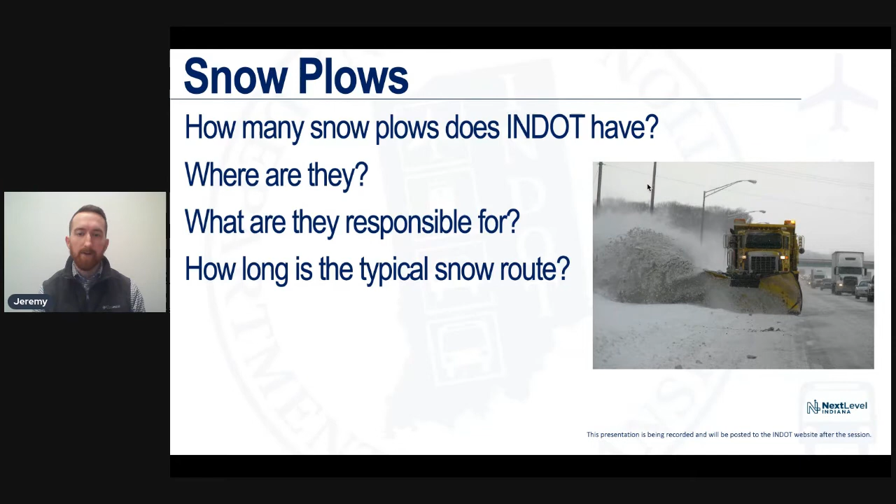So how long is a typical snow route? Snow routes can vary, but generally they're around 30 miles for the entire route. The time to completion can be anywhere from an hour and a half to 2.5 hours, depending on a variety of factors. One of the big ones is how rural that route is - does the driver have to drive a bit further to reach that route before they can even begin?

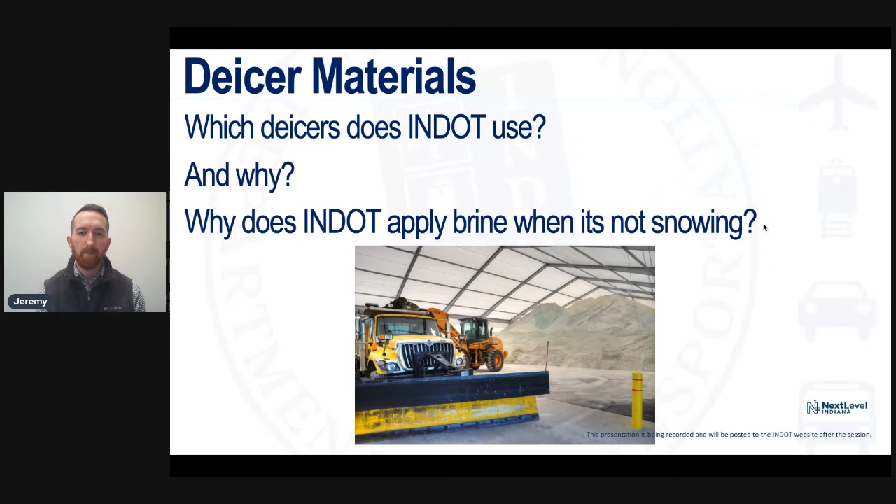That's a good question. One of the primary tools INDOT uses is called MDSS, or Maintenance Decision Support System. INDOT's been using this since the early 2000s. We were actually one of the pioneers of this system, and now it's being used by about a dozen states around the US. What MDSS does is provide a more route-specific or road-level forecast, whereas from AccuWeather or the news station you may see just an atmospheric forecast. So they take that weather impact we're receiving from the National Weather Service and AccuWeather and all of those, and apply it to the road surface to tell us exactly what we can expect to see on the roads.

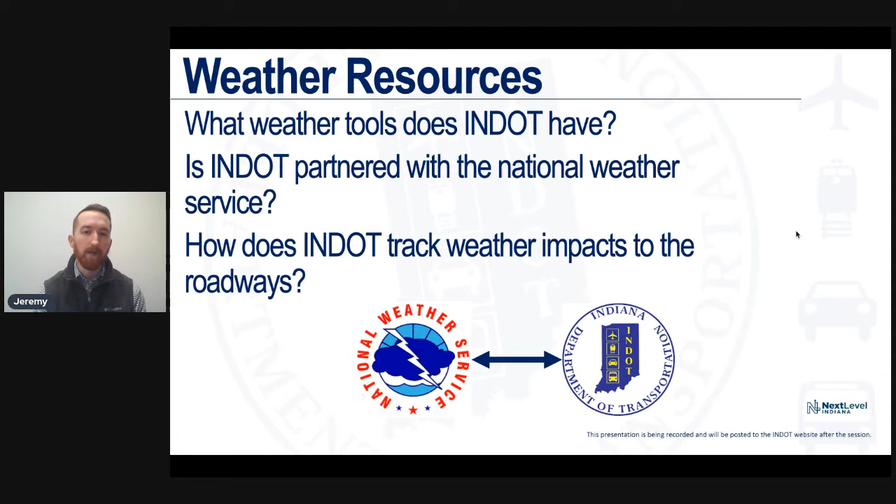Beth asked, please explain the preferred procedures for town plowing across state roads. We usually keep blades down when crossing the intersections. I don't think there's a preferred procedure - I think we should all be wary of what the other is doing at all times, whether it's the plowing or the applying of materials. From personal experience, whenever I was down south managing operations in southern Indiana, we crossed state lines quite a bit and worked with the Kentucky Transportation Cabinet, and we communicated these things with each other in advance. So I think that's the most important piece - partnering with whoever your local INDOT contact is, and having those discussions ahead of time.

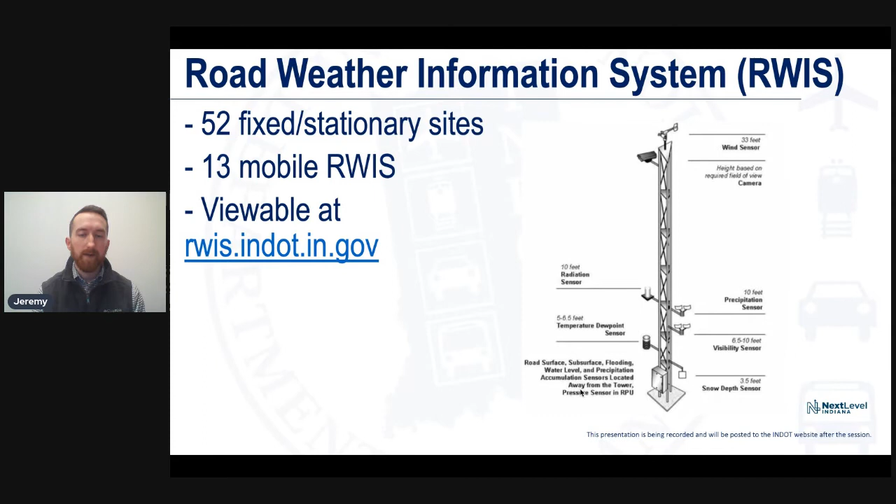In addition to that, we also have 13 mobile RWIS devices. These are installed on our dump truck fleet and a couple of supervisor vehicles, constantly out on the roadway picking up measurements in real time on the road surface. All of this information is actually viewable by the public at rwis.indot.in.gov. You can also just Google INDOT RWIS if you're having trouble finding it.

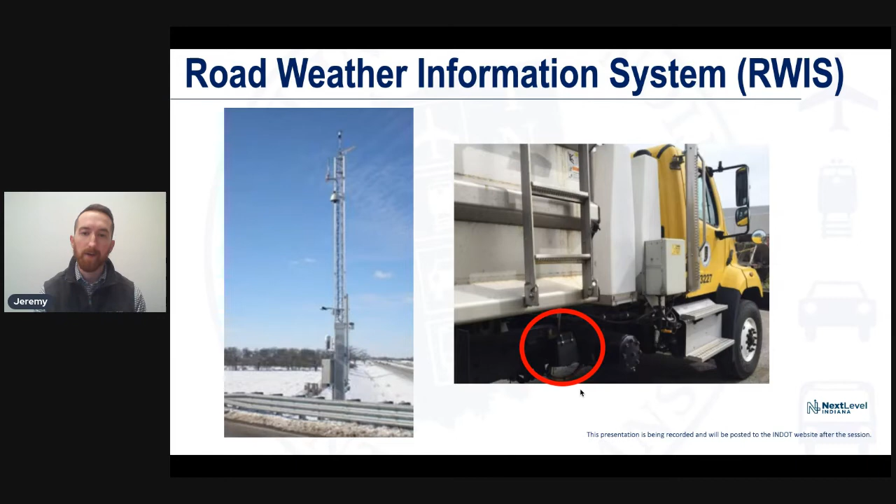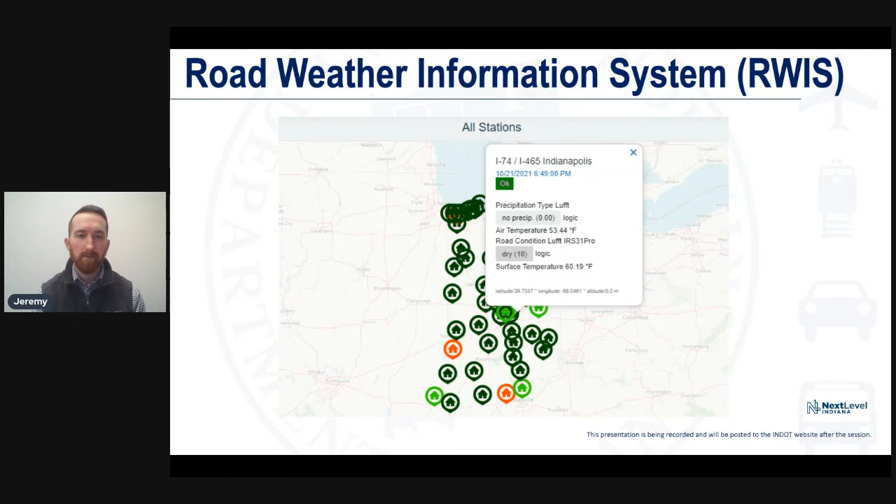If you go to the RWIS website I mentioned, this is the home screen you'll see. This is a map of all the stations we have, and if the mobile devices are deployed at that time, you'll see those on the map as well. You can click on any of those sites and it'll pull up a quick snapshot of the data that device is pulling at that time. As you can see, I have Indianapolis at I-74 and I-465, and that device is pulling data right here.

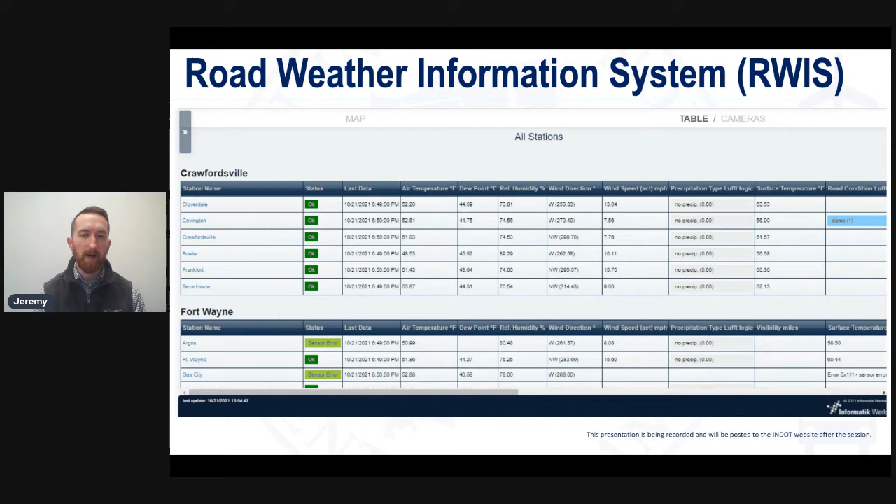Further, you can drill down by selecting any of those individual sites and pull up a dashboard that allows you to view individual weather parameters. There are also cameras installed on these sites that can provide a good deal of verification as to what's going on out there. If the precip sensor is picking up that it's raining and it's a heavy intensity, you should be able to see that on the camera. I think these are a very useful tool if you're weather savvy or interested in understanding what's going on out on the roadway in real time.

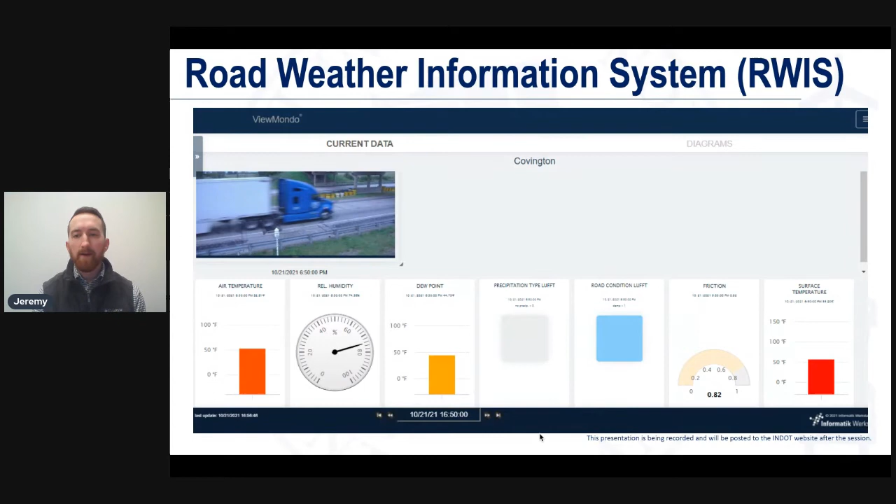The next item I wanted to touch on was our TrafficWise or 511 program. We recently went through an update on this, so I'm kind of excited that you guys get to be the first to see it.

So with that said, the two biggest changes, if you've been on our 511 before - it actually used to be called the CARS program, but now we've changed the name to TrafficWise. The biggest change is the graphical user interface. It's much more modernized, it's easier to use, it flows better.

The second biggest change is the plow tracker feature. It's very cool because, you know, we're not the first state to implement this feature, but there's a lot of good stuff that can be gained from allowing everybody else to see this plow information. So all of this is viewable at the 511in.org link I have on the screen.

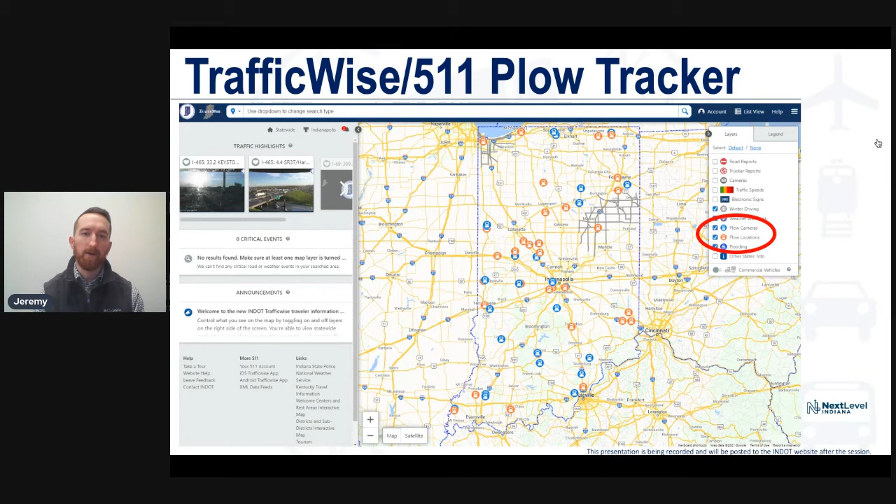So if we get into a large winter event, you're actually going to see a huge amount of those trucks deployed across the state. You can get a good idea of what's happening out there. Next slide. So I also selected one of those trucks just so I could give you a snapshot.

Unfortunately, or fortunately, depending on who you talk to, it's not snowing yet, so you just get to see rain here from the day that I pulled the information. These will be available year round, or at least that's the intent right now. So if you do want to use it, you can begin using it today to understand what's going on out there in the roadways.

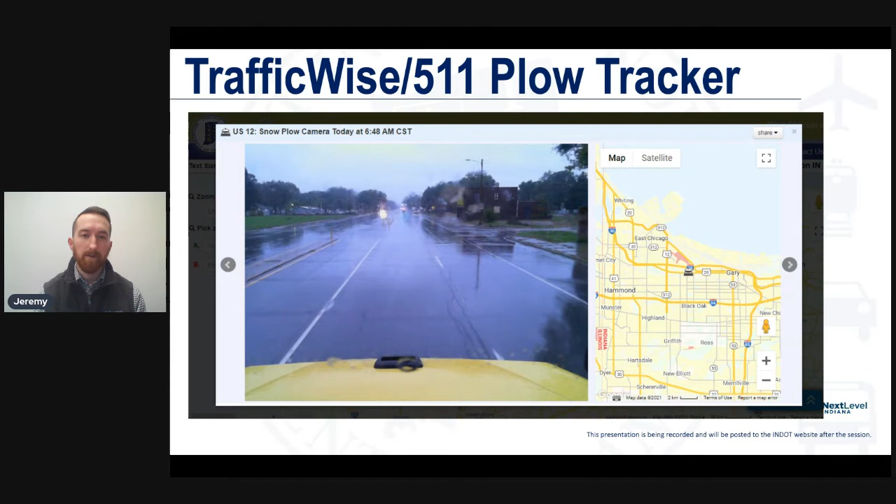I do want to make this available to everyone. It's important to us that everybody can start using this and see this plow tracker data, because it helps you make more informed decisions before you leave your house for your commute, or take your kids to school. You can get on there and actually see what's happening on the roadway, especially in your own area. Like I said, we have 1,100 snow trucks, so chances are you're going to find a truck that's near your house at the time you're looking, and be able to make those smart decisions. I really want to get people using this so we can make those more informed decisions.

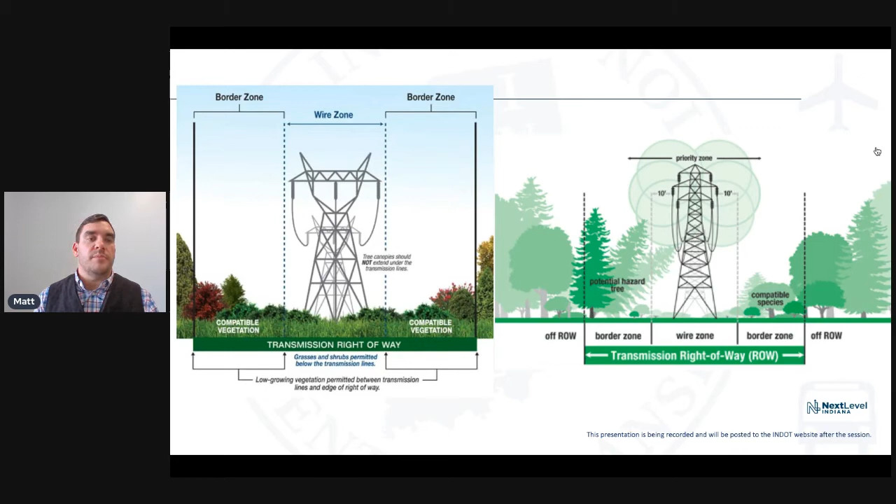Obviously, we can't have trees growing too close to those conductors in the event that there's a storm or some kind of event that causes that tree to come in contact with the conductor. The closer you are to the wires, the less you are able to keep taller vegetation in that space. So the idea of compatible vegetation or compatible species changes depending on where you are within that right-of-way space.

For instance, to ensure surface drainage immediately adjacent to the road, or if you get a little bit further off, you may need to keep obstructions like a tree or other obstructions clear in that particular space. So it may be the operational zone, for instance.

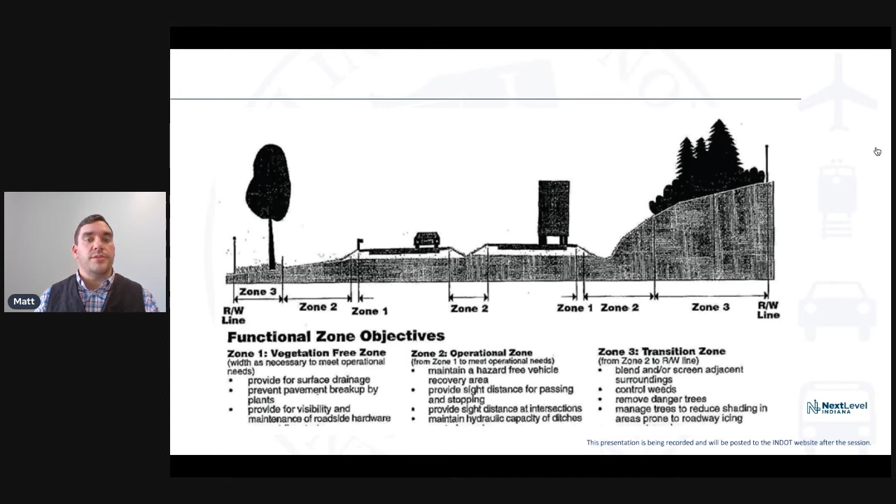So we have a handful of tools available to us to manage vegetation within the right-of-way. This is the idea of integrated pest management, or IPM, if you're familiar with other forms of management for pests. But when we get into the specifics associated with vegetation, we coined the term integrated vegetation management, or IVM. In that, we have a number of different tools.

We have the idea of chemical, or the use of some form of an herbicide. We have the mechanical tool, whether that's using a chainsaw or a forestry mulcher or a mower to be able to mow the vegetation and shorten it down. We also have—and I'll skip over the next one—the idea of biological control agents, and there are some insect pests that can be released, not something that INDOT does specifically, but has been done in the Midwest for the control of purple loosestrife, for example, or some other thistles in the western states.

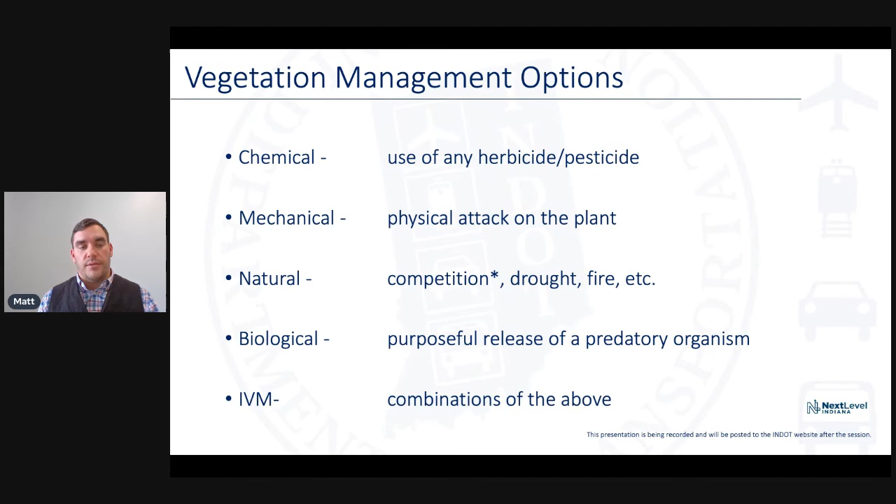This is certainly something that can be done, though our resources here are relatively limited. I have an asterisk next to the idea of competition in the natural form of vegetation management options. The reason for that is through the use of our other control options, the chemical and mechanical, we can actually promote desirable vegetation, which is used as a tool to compete against undesirable or incompatible vegetation within the right of way. I'll try to touch on that more as we move forward.

You can learn more information about this at greenercrossroads.com. There's some other details associated with that, but for the purposes of today's presentation, I wanted to discuss some key points.

One is that we are going to mow 15 feet along the edge of every shoulder, with the exception of a couple of locations. One of those is intersections, where we'll mow a sight distance triangle that's going to expand beyond 15 feet. So at a county road, for instance, that space is going to be mowed out to ensure motorists at that intersection are able to see both directions down the right of way. And in medians that are less than 60 feet in width, so on the interstate or maybe a US route with a divided vegetated median, that space is going to be mowed full width as well.

Another point where we're using mechanical clearing is with invasive brush species that are growing, most of the time, within that selective zone or beyond that space, where we'll use a forestry mulcher or some other form of mechanical removal of that woody vegetation.

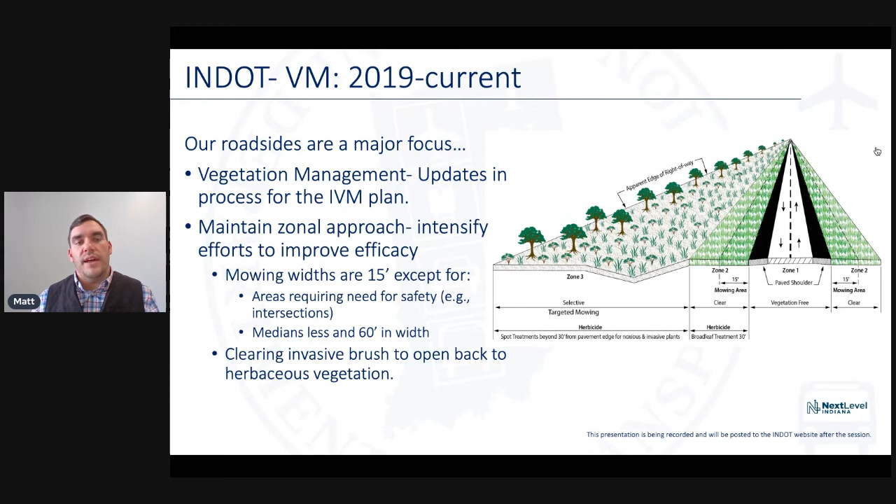One of the challenges with utilizing mechanical control is just like mowing your yard - you go out and mow it, and the vegetation grows right back. There's some cadence required to be able to maintain that height and keep it at a desirable state. It's a little bit tricky when it comes to woody vegetation, especially the invasive species we have growing within our right of way.

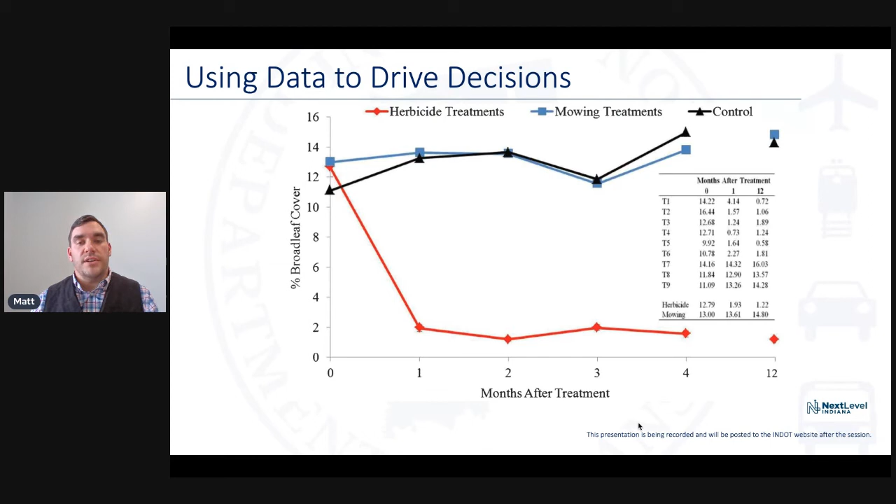One question is, do you have to use herbicide? Justin, that's a great question, and I think I've been alluding to that a little bit as we've been talking through this - it's one of the tools that we have in our toolbox. It's something we can utilize to control certain species. There's a number of species out there where mechanically cutting them off doesn't work. If you take a Canada thistle plant, for example, you can mow that plant off seven or more times in a year, and it's going to stay present and be there forever. So if we truly want to remove that from the system because it's a state noxious weed, we need to utilize a different control method, and herbicides are one of those effective tools.

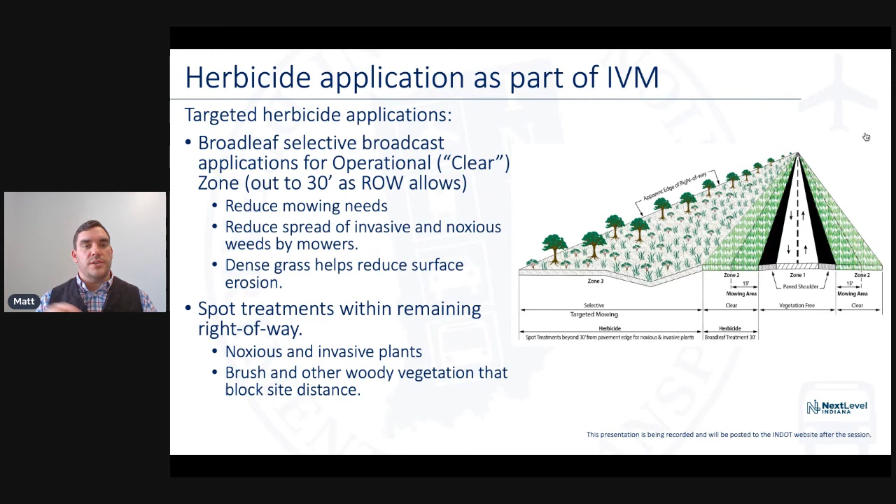Beyond that clear zone, or operational zone, we focus primarily on utilizing spot treatments, targeting individual plants or smaller populations. It's not mile by mile down the roadway like we do with the selective treatment, because we're trying to target isolated populations.

These trucks are moving approximately 12 miles an hour down the road, making that treatment. They're shutting those nozzles off every time they get to a landscaped or a maintained yard, bodies of water, or any other special feature that may be present within the right-of-way. And the applicators are required to follow the label associated with that pesticide, and there may be some additional restrictions associated with that, and we take that very seriously.

The one thing that I do commonly get questions about is: is this material safe? I will make the statement here that INDOT does its best to try to use the herbicide products that are most environmentally friendly and safe, as well as safe for humans and for wildlife. And so there's sometimes some concerns about maybe pets that may enter that space, or wildlife, or even pedestrians potentially. And the majority of the products that we have, in fact all the products that we have, the restricted reentry period associated with that is waiting until the spray is dried.